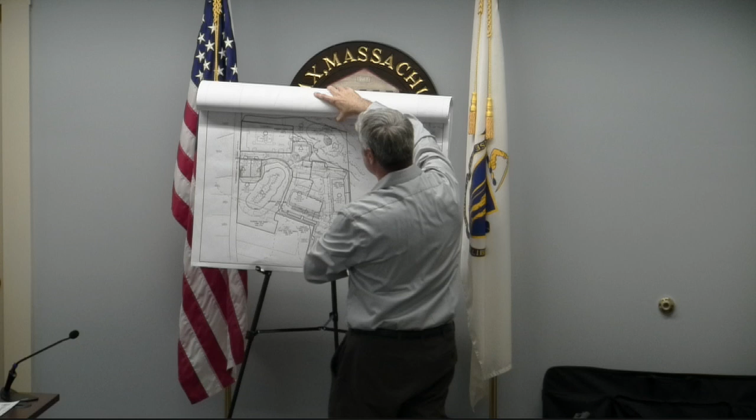55 right here, that's the design point, where the water leaves the site. What's your road elevation? Proposed road, 74, 73, 71. Okay, so your road elevation is pretty much the same elevation as the condo property? Yep.

Joe, if you got a question, just come on up. Got another question for him? Just trying to keep things moving. I was just wondering, are they bringing the elevations up on this property at all, or is what we see over there today what the elevations are going to be? Mr. Driscoll? We are raising some portions of the site, I think in the center.

Overall, I believe it's in fill because the previous projects had higher grades in the middle, and the picture of the previous project showed one of the foundations right here, with driveways and garages around the back. So yeah, the grades up here will be raised, and over here, right here, those are going to remain the same. There'll be a wall up here for the pool. The pool's going to look higher, and the foundation of the banner building will be somewhat of a retaining wall as well, grading back down. So overall, to answer your question, yes, there'll be more material raising portions of the grades of the site.

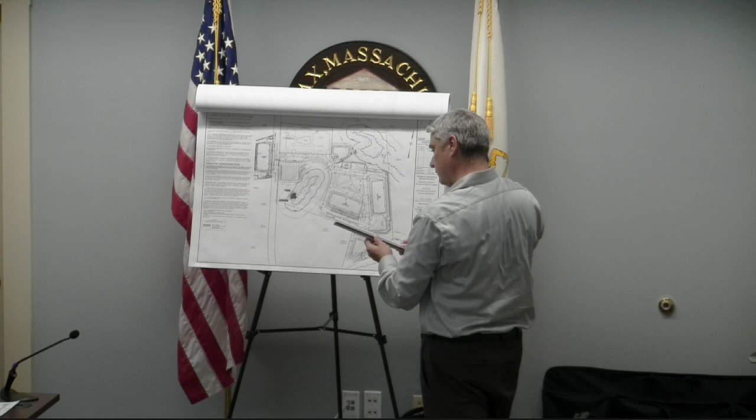Yeah, about 110. Is it? Yeah, yeah.

Good answer. Is it a fair assumption that the material you're going to be excavating from the retention ponds, plus a minimal amount coming out of the buildings, is all going to be retained on site? Yeah. Okay, so to satisfy the condo people, could they put a rubber barrier on the north side of that drainage basin, like we do with septic systems?

To keep, I'm going to tell you from experience, rubber barriers are strictly for surface water. The impact at the condos is going to be groundwater. There's going to be infiltration of groundwater coming back up, so it'll be rainwater. An infiltration barrier wouldn't be helpful. Plus, they're working within the wetlands area. We're not going to allow that.

Okay, so Greg, if you don't mind, the top line on this infiltration basin is elevation what? I can't see that. 70. Yes, 70? And that's 71 right there, so the berm around it slopes up a little bit.

And the condo elevation is 75. So you've got a 4 feet differential. So it drops down 4 feet from the top of the basin.

Okay, and then the bottom of the basin should be 2 feet above mottling. I'm assuming, actually I think it might be further. Okay, that's okay, as long as you get your 2 foot minimum. I mean, technically, it's the same amount of rainwater just being concentrated in different spots on the property. That would be a correct assumption.

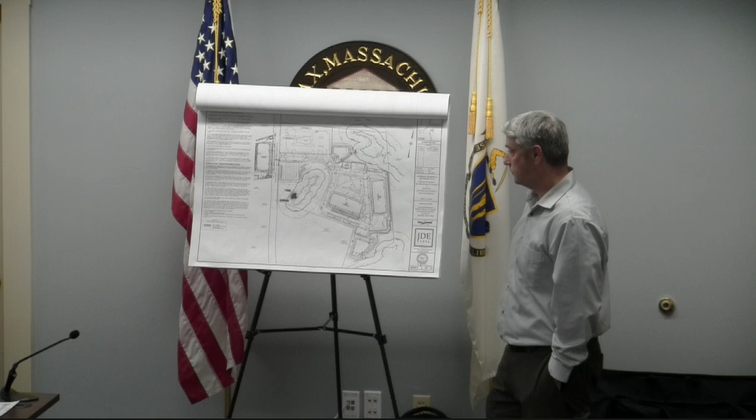So for the audience's sake, for retention or detention basins, you're building the one at the north part of the property. That one's gonna be already partially done from the previous phase, but that's what you're gonna construct. And then the bottom portion of the property, that's what you're gonna construct. The other two wetlands areas are there, this and this. Well, 3 wetlands areas.

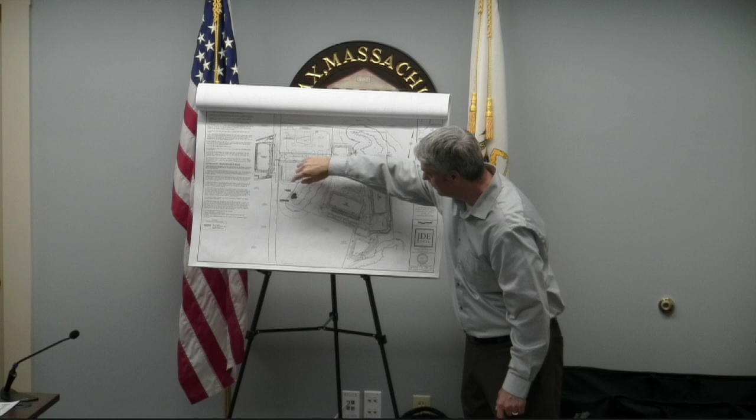Okay, and for the pavement that's going to be constructed for the pickleball courts, we have rain gardens next to those, and then the subsurface system that's underneath the parking lot, the drainage system. Okay, do we have...

Just to clarify, identify yourself. Joseph Tonello again. Just to clarify for the people here that don't know the difference between a retention and a detention basin — the only reason I know is I had to build it. So Greg, I'm sure not one person here knows the difference. Okay, I'll let you explain that.

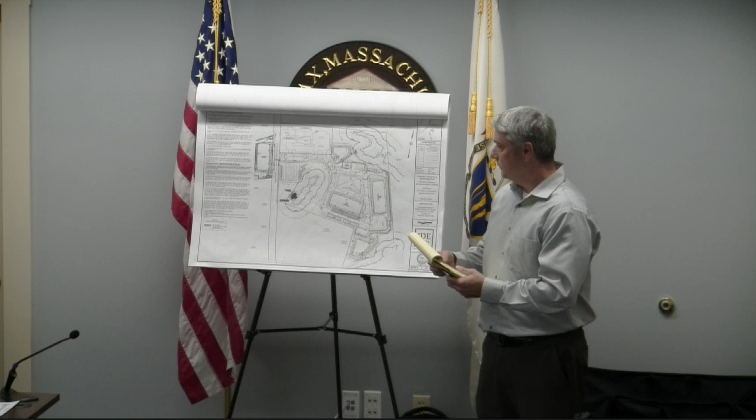And just so you know, this is part of the stormwater process — a certain amount of effluent has to be retained and detained, and then infiltrated into the ground. So why don't you explain? Sure. A detention basin would be a basin that just holds the water, it doesn't allow any water to recharge into the ground — might be lined or have a clay liner or something like that. It's just to hold the water back and let it out slowly. An infiltration basin, which we have designed here using the subsurface, is designed for water to infiltrate through the bottom and recharge the groundwater table. So it not only holds the water back and lets it out slowly, it also recharges the groundwater at the same time.

Pat, if you don't mind — I believe you addressed that in your review, because one of the basins had too much loam, and the other one you wanted some additional loam to make sure that when detained and... Right, so Pat Brennan again, PGB Engineering.

So in the stormwater standards, there's a couple of things that you need to do. The main thing is that you cannot increase post-development runoff off-site, which Greg reviewed. The other thing is that you're supposed to kind of mirror what happens today — with what goes into the ground now, you basically have to put the same amount back into the ground in the post-development. That's why he has the infiltration basins designed to put back into the ground what's going into the ground today. Obviously, when you pave a site, you're blocking it from going into the ground, so you have to put in these artificial — we call them artificial — either the open air basins or the subsurface infiltration basins.

That's the mechanism to get that water back into the ground that goes in the ground today. So that's what the whole design premise is based on. And what that does — the stormwater, the Mass DEP regulations, really only require you to mitigate the rate of runoff, which is how quickly the runoff runs off the property.

I always look at the volume of runoff as well, because the volume can also be an issue. When you design these infiltration basins, if you put all the volume back into the ground that goes in today, then you don't increase the volume that leaves the site either, which is what they've shown with their design. So what leaves the site today will not be increased under proposed conditions based on the design he's come up with, and I'll review it.

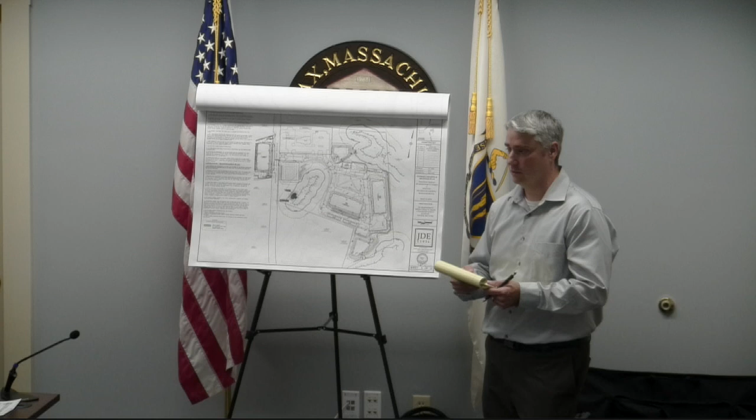And I can confirm, even though it's a Board of Health issue, we did perform a mounding analysis and submitted it with the plans. Mr. Delano, who was reviewing for the Board of Health, hasn't commented on it, so he's okay with it as far as we can tell.

Any other questions from the audience? Ms. Chu? I would like to know the number, because a few minutes ago we were asking what that number was between the groundwater—the separation of groundwater. I would like to know what that number is. Thank you.

Yeah, so what we were just talking about, Pat—where it has to be over 2 feet, then over 4 feet with the mounding—what is that criteria called? They have to be 2 feet, but if they're less than 4 feet, they need to do that mounding analysis. They are more than 4 feet above groundwater in all 3 of their infiltration systems. So what would that number be called is what I'm asking. The separation—it's just separation from groundwater. Can I have that number, please?

So if we're basing on 2A, we have 4.48 feet of separation, 4.14 feet for the infiltration system, and I'm trying to find it for the other one.

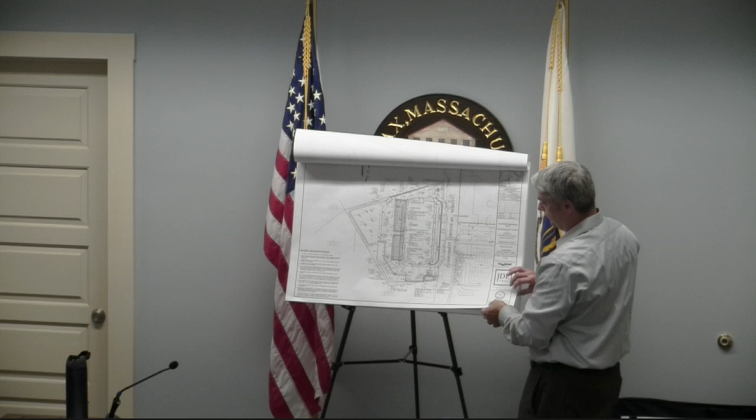We have, in order to treat this section of the driveways, a forebay right here. So the water feeds into this, goes down to here, into this rain garden with another subsurface infiltration system, to give us enough capacity for the flows that it sees.

So this is the pre-development drainage areas, much smaller site. Majority of the site drains in this direction, and a portion of the site, a very small portion, drains out to Monponsett Street. So this is design point 1, and Monponsett Street is design point 2.

And these are the areas as they're split up and sent into the infiltration system, the forebay, the rain garden, and infiltration system. So all the paved areas are directed into treatment systems, treated for TSS. It's all infiltrating to the groundwater. Non-paved areas, grass area, flows off the site overland, a little bit here, a small sliver, and then this grass area over here.

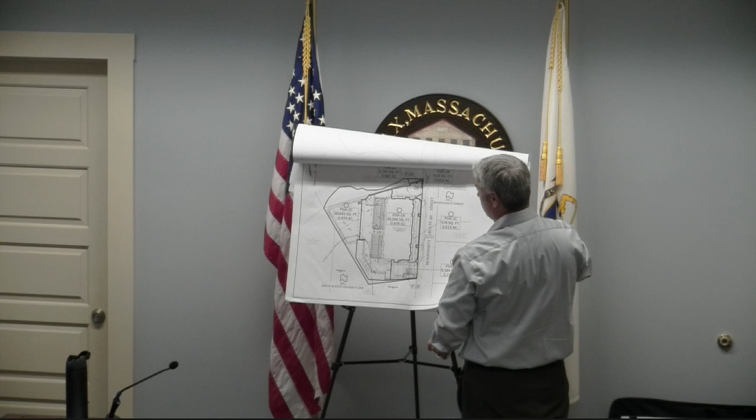There's a small portion of the site to the north that comes onto our site, and it will come together and follow it that way. That's kind of the overview of the system.

Pat Brennan has reviewed this project as well and provided comments, which we responded to through the planning board process. And if you want to hear from him, Pat, could we listen to your comments? I know they were very lengthy, and I think you reviewed this 2 or 3 times.

For the record, again, Pat Brennan reviewed this—this one I started reviewing for the planning board before they went to conservation, so all of my letters were addressed to the planning board, even though I reviewed it for stormwater. My first letter, I reviewed it first back in April, again in June, twice in June, and then once in July.

This one, as Greg said, meets all the standards. If you recall in the last one, I said that they were retaining like 75,000 cubic feet. This one, it's around 8,000 cubic feet that they're retaining with this storage on site, which is a little bit more than double what the 1-inch rule is in your stormwater regulations. So they still meet that regulation. As Greg mentioned, they're cleaning it up with the forebays, the rain garden, and deep sump catch basins.